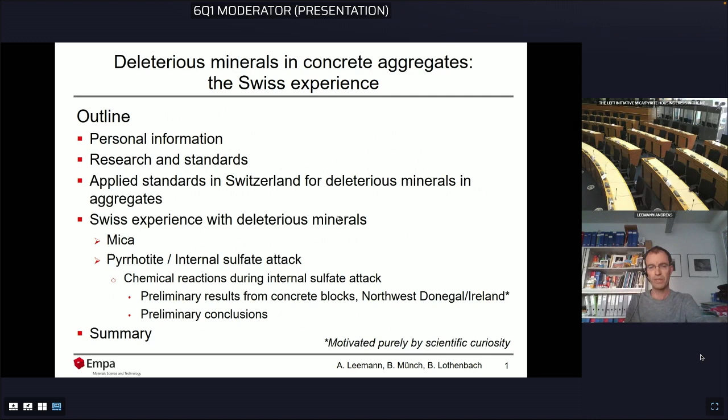Next, please. So personal information: I have a master in geology and did a PhD in limnogeology. Since '95, I'm at Empa. I'm heading the concrete technology group. I'm a member of several national, international committees and standardization groups. The research topics I work on, the main focus is concrete durability, and this includes a lot of microstructural analysis. But I work as well with recycling concrete and special concrete mix designs.

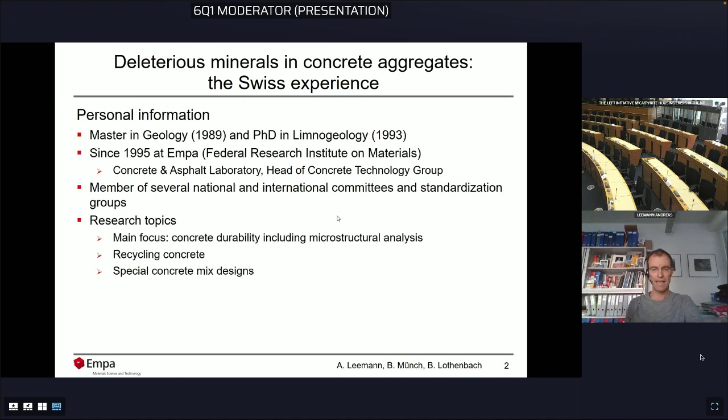Next, please. So, research and standards. Several Swiss concrete standards and their limit values are based on results of research projects. This goes from freeze-thaw resistance to chloride resistance, sulfate attack, carbonation resistance, and water conductivity. The impact my research had on standards was the following. The research on mica resulted in adaptation of the Swiss standards on concrete aggregates.

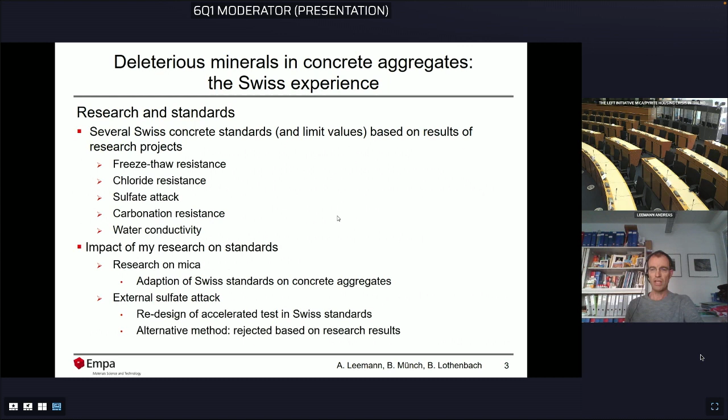My work on external sulfate attack led to the redesign of the accelerated test in the Swiss standards, and an alternative method to test sulfate attack was rejected based on a project I did. So you see, research can really influence standards. Next, please.

So what are we using for concrete aggregate standard-wise? So we have a Swiss standard, 670 115. It limits the amount of deleterious minerals in the aggregates to 5 mass%, and this includes mica. If the amount is between 5 to 10 mass%, concrete tests have to be performed to show that the concrete reaches defined performance criteria.

Now, about iron sulfides. Swiss standard SN EN 12620. There are limits given there to total sulfur content of the aggregates, and how this sulfur content is determined is defined in another standard, the SN EN 1744-1. And if you look at the table at the bottom, you see there the total sulfur content. There are in principle 3 categories.

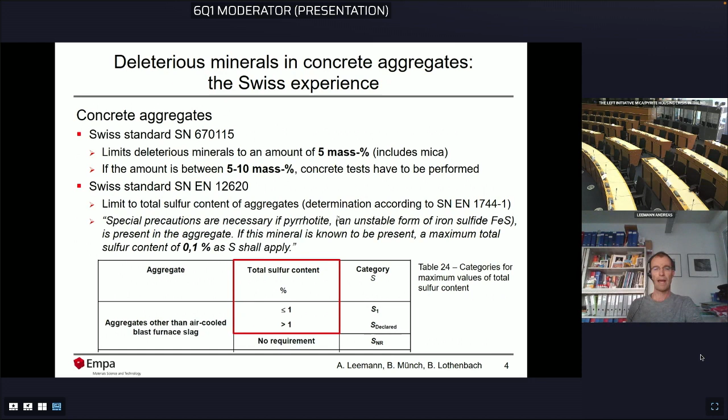If your total sulfur content is below 1, it's S1. If it's above, it has to be declared, and there's a class with no requirement. And it is stated that special precautions are necessary if pyrrhotite is present in the aggregate. If this mineral is known to be present, the maximum total sulfur content of 0.1% as sulfur shall apply. Next, please.

So what is our experience with mica in the aggregates? So it was a major issue during the construction of the Gotthard Tunnel built between 1999 and 2016. It's the 57-kilometer long tunnel crossing the Alps. It was defined that excavated rocks had to be reused as concrete aggregates. And the mica content in general was high, sometimes very high. What did we learn from this?

A high mica content increases water demand to reach a certain workability in concrete production. If you counteract this with adding more water, which means increasing water-cement ratio, this results in a decreased concrete strength, increased water absorption, and so on, which just means decreased quality. If it is counteracted by increasing cement and superplasticizer content and unchanged water-cement ratio, relatively small impact is observed, and this is shown by a lot of strength and durability tests.

The biggest challenge during the project was the continuous adaptation of concrete mix design to changes in aggregate quality, and this included content and type of mica and layer silicates. So we had all types of mica and layer silicates possible, more or less. Just no clays, I have to mention this. In one section that was a few kilometers long, mica content was decreased using a special flotation technique.

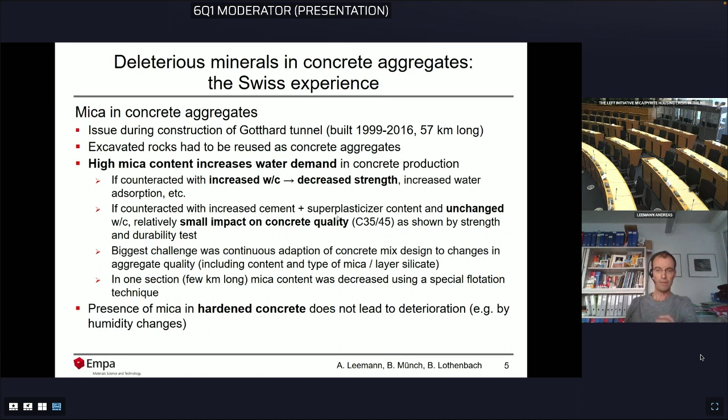And what our experience has clearly shown, presence of mica in hardened concrete does not lead to deterioration like by humidity changes. The mica we have in Switzerland show no swelling at all. Okay. Now, please to the next slide.

So our experience with pyrrhotite, or iron sulfide oxidation in general, that is linked to internal sulfate attack. We had actually only one major case in Switzerland, and that's the Isola Dam, built between 1957 and 63. It's a gravity dam, 290 meters long, 45 meters high. It started to expand continuously in the mid-80s, and due to this swelling, operation was impaired.

So last year, the dam was cut. On image A, you see a top view of the dam. Image B shows an installation of the cutting equipment. And in C, you see what has actually been done. Well, first, of course, the water had to be released before this was done.

You drill a hole through the entire dam, more than 6 meters wide. Then you insert a wire saw and cut the entire cross-section of the dam. So about 10 tons of concrete were removed that way, and the gap was filled with a soft watertight material, and the stress was released, and the dam is back to operation.

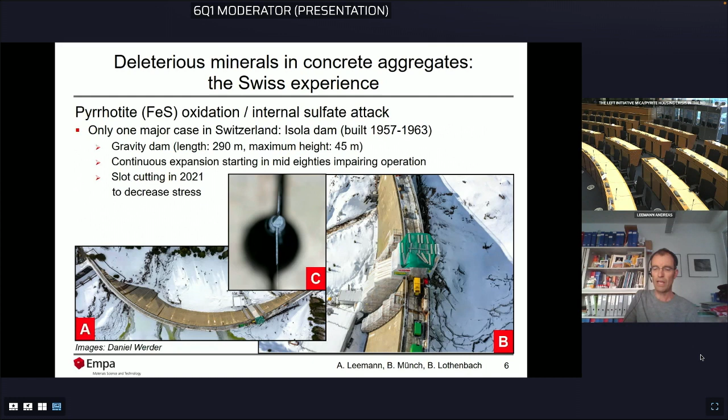Now, what does actually happen in this internal sulfate attack? That's what I want to talk about now. Please, next slide.

So don't be afraid, it's not as complicated as it looks. So what do we have here? This is an image that was done with thermodynamic modeling. What you have are the hydrates formed by cement hydration, so this is what is present in your concrete. Now let's start on the left-hand side. At the bottom, I just highlighted the phases that are important to explain what happens.

So first, you have the calcium silicate hydrate, abbreviated CSH. You have ettringite, you have monosulfate. Now, you put pyrrhotite on top of it. And going from left to right, you oxidize this pyrrhotite. This means sulfur is released into the concrete. Now please look at the green area represented by the monosulfate. When you release sulfur, the amount of monosulfate gets smaller and smaller until you reach the dashed line, okay?

Ettringite is formed at the expense of monosulfate. And if you form ettringite in a hardened concrete, you will experience stress, expansion, and cracking. But it doesn't end there, because still more sulfur is released. And when all the monosulfate is used up, you start with phase 2. A new mineral is formed. To the upper right, you see thaumasite.

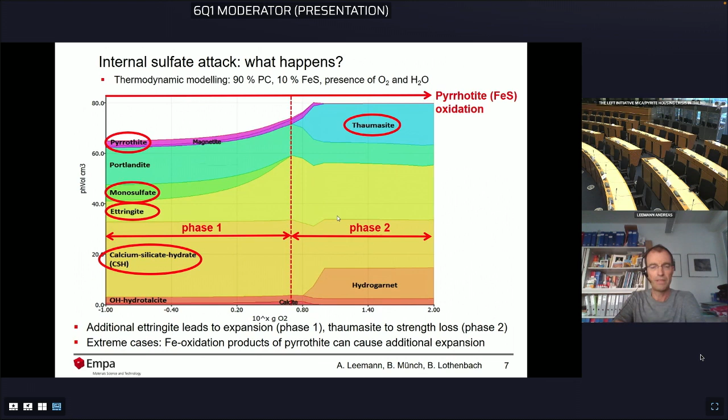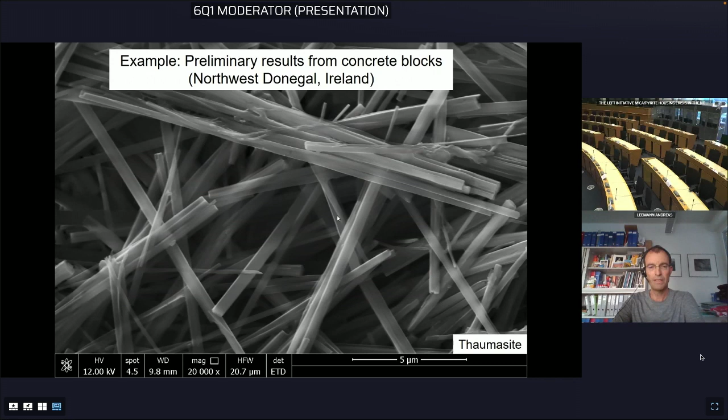Okay, this is a polished concrete section. You see the scale as well. The grayscale values more or less represent the density of the phases you have here. Standing out, very bright, this is pyrrhotite. What you can observe as well in this bright mineral are veins that are somewhat darker. This is oxidized pyrrhotite. To your left-hand side is more or less the cement paste. Now, I did a sulfur mapping of this, showing where the sulfur at this particular location is. Next, please.

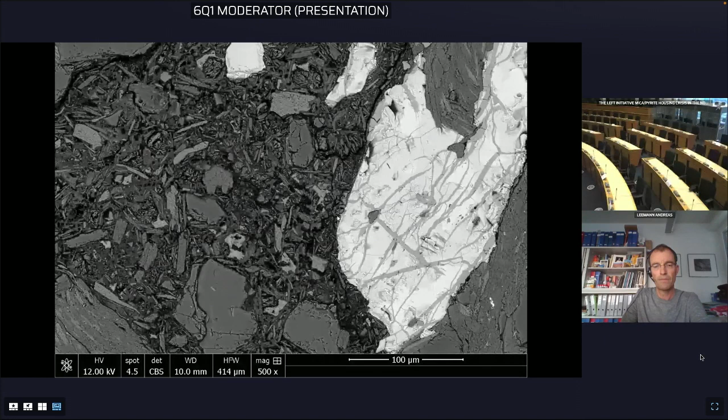Okay, the brighter the blue, the more sulfur is here. So you see, of course, pyrrhotite stands out. However, you see these bluish pockets in the cement paste. And now you can perform more element maps and form a so-called phase map. Next, please.

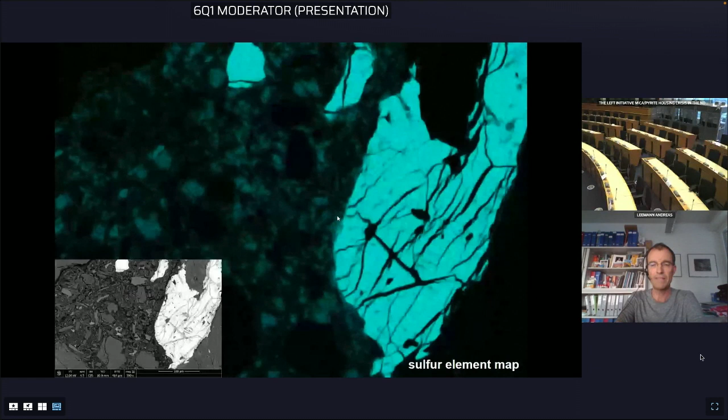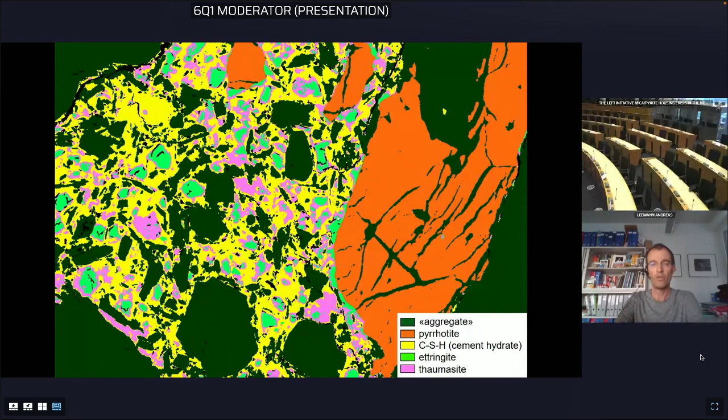Now, the legend is in your lower right corner. Dark green is the aggregate, bright orange the pyrrhotite, then yellow is the CSH that gives the concrete its strength. Green is ettringite. And very important here, you don't see monosulfate anymore because all the monosulfate has already been transferred to ettringite. This means this concrete has already gone through an expansion phase. And more than that, you see the pink mineral, this is thaumasite. So CSH is already transformed into thaumasite, which is connected to a strength loss.

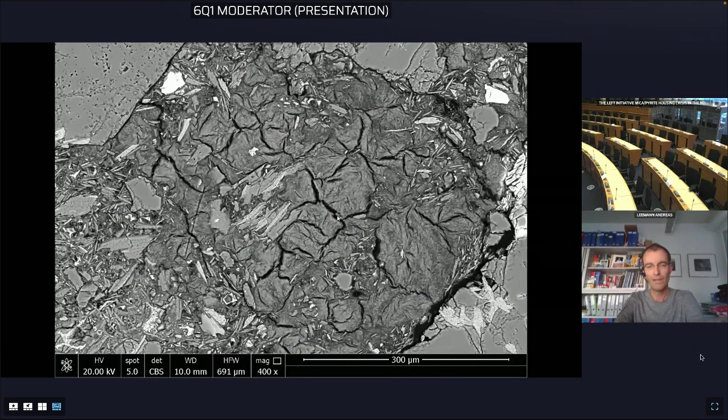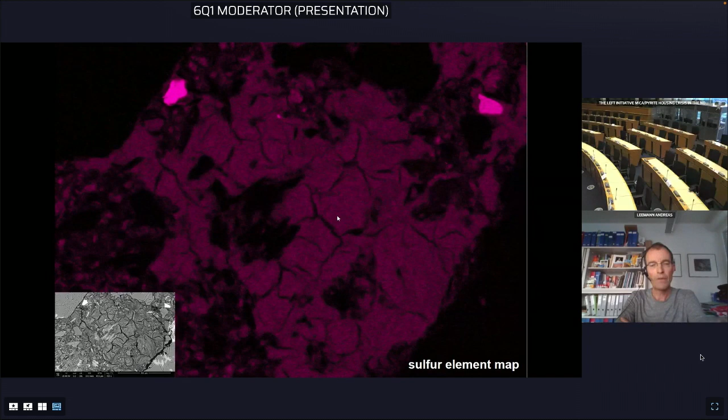Next, please. So this is another sample. Looks pretty harmless, whatever. But let's do a sulfur mapping. Next, please. You see you have these two bright spots. These are two small pyrrhotite particles. And then you have a relatively homogeneous area of pink, which means homogeneous sulfur distribution. Now we do the same thing again as before. We produce a phase map. Next, please.

Legend upper left corner: dark green aggregate, orange pyrrhotite, yellow CSH, green ettringite, and now you see this large pink area. This is thaumasite. This concrete has gone through a severe strength loss. And unfortunately, the story doesn't end here. You have a natural process that concrete is exposed to. It's called carbonation. This means concrete reacts with CO2 from the air and forms new phases. Usually, this is harmless. However, if you have a concrete that has gone through phases 1 and 2, which means internal sulfate attack, it's not that harmless. Next, please.

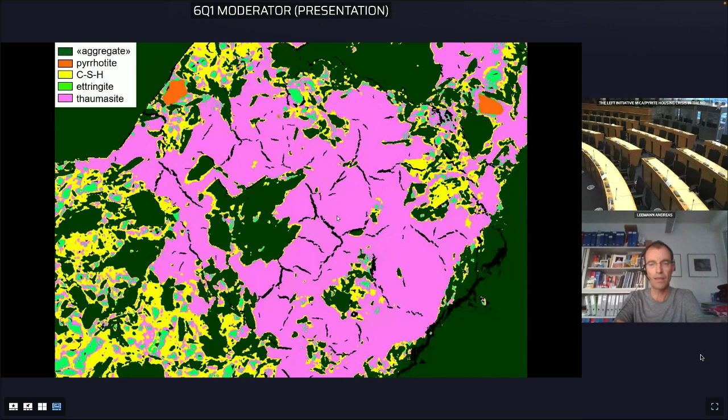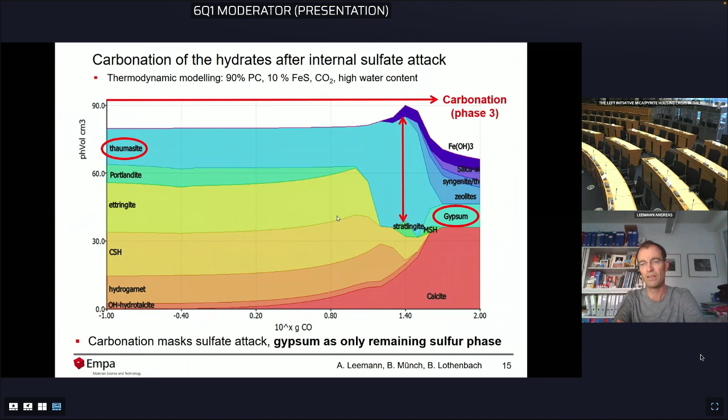And gypsum is the only phase that is kind of a witness that shows what has happened before in phases 1 and 2. And I have to stress, gypsum does not form directly in phases 1 and 2 because the pH is just too high. It forms at the end. And gypsum is water soluble, which means when your concrete is getting wet, it disappears. Next, please.

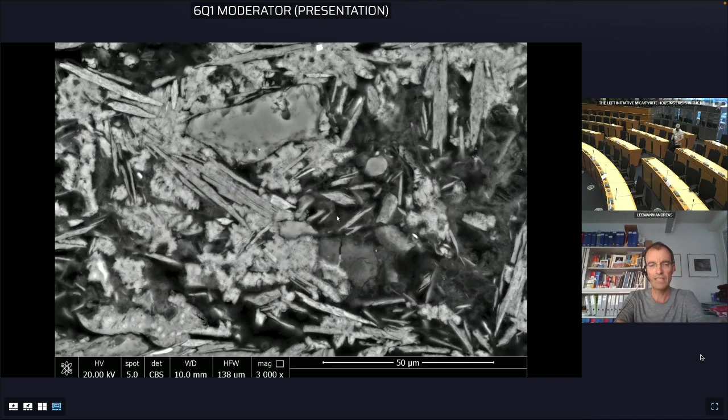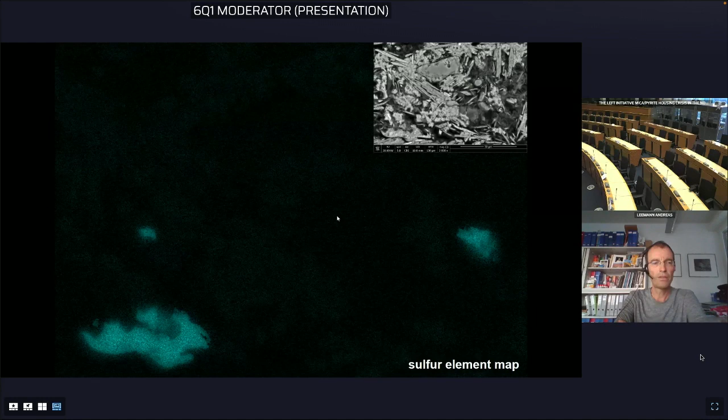Back to the concrete. This is a section of cement paste. Again, we do the sulfur mapping. Next, please. Now you see only 3 spots that have this blue color, which means where the sulfur is. Again, a phase map is done. Next, please. So again, dark green the aggregate, yellow the calcite, pink the silica gel, both products of carbonation, and green the gypsum, the only witness that is left from what has happened before. Next, please.

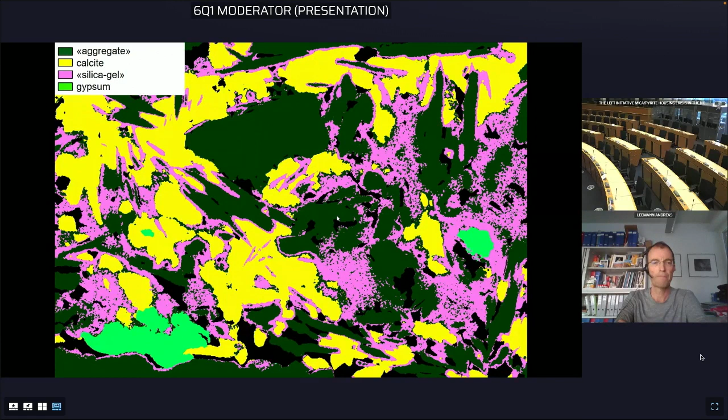So the Irish concrete blocks, preliminary conclusions from a limited number of samples. Deterioration of the analyzed concrete blocks is not a mica problem. The analyzed concrete blocks suffer from internal sulfate attack triggered by pyrrhotite oxidation with sulfur release, followed by carbonation. Phase 1, formation of additional ettringite leads to expansion cracking. Phase 2, formation of thaumasite leads to strength decrease. Phase 3, carbonation boosts thaumasite formation and at the end leads to formation of calcite, silica gel, and water-soluble gypsum.

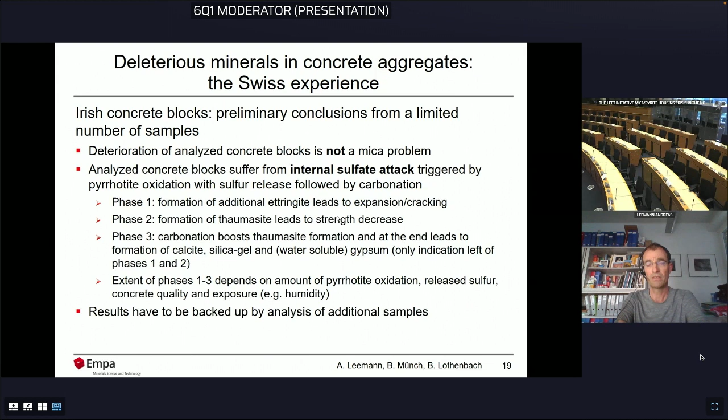The extent of phases 1 to 3 depends on the amount of pyrrhotite oxidation, and with that, of course, the amount of released sulfur, concrete quality, and exposure, which means humidity. Humidity accelerates the reaction. And the results should be backed up by further analysis of concrete samples. Next and last slide, please.